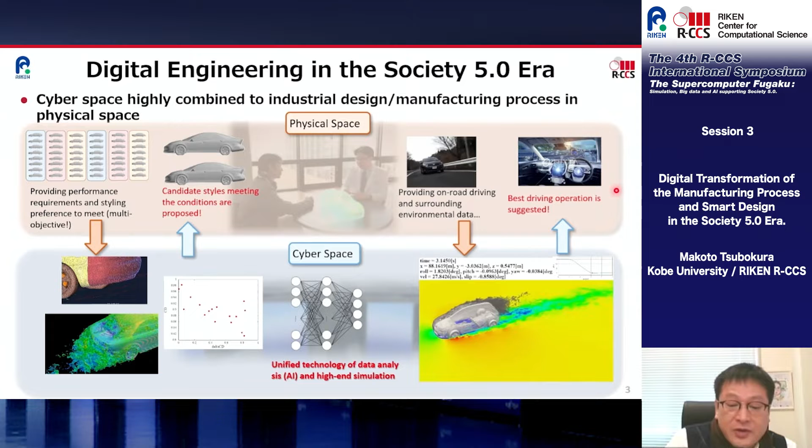On your right is a sort of digital twin, providing on-road driving and the surrounding environmental data. Many high fidelity simulations together with virtual drivers are executed simultaneously, and the AI suggests the best driving operation depending on the driving condition.

Then what sort of software should be developed to realize such digital engineering in the Society 5.0? Firstly, we have to deal with a huge number of simulations at very high speed, including both pre and post processing. Secondly, simulation should be not only high precision, but also a sort of tailor-made to realize a real digital twin by precisely reproducing each product shape and considering the enormous real-world conditions.

Unfortunately, the current engineering simulation framework based on the unstructured mesh system does not meet these requirements. Firstly, a huge amount of workload is required for the pre-processing of calculations, shown in the pie chart here. This figure shows the turnaround time for a conventional vehicle aerodynamics CFD in industry in hours. Typically, 8 times longer time is necessary for the pre-processing compared with the simulation itself. This is because of the data cleaning requirement to make a watertight surface for the unstructured mesh system.

Secondly, unstructured data fundamentally have difficulty in tuning on new hardware architectures because of the irregular memory access. There are various ways to improve calculation efficiency by serializing data access or utilizing cache reusability, but it tends to be memory access bound.

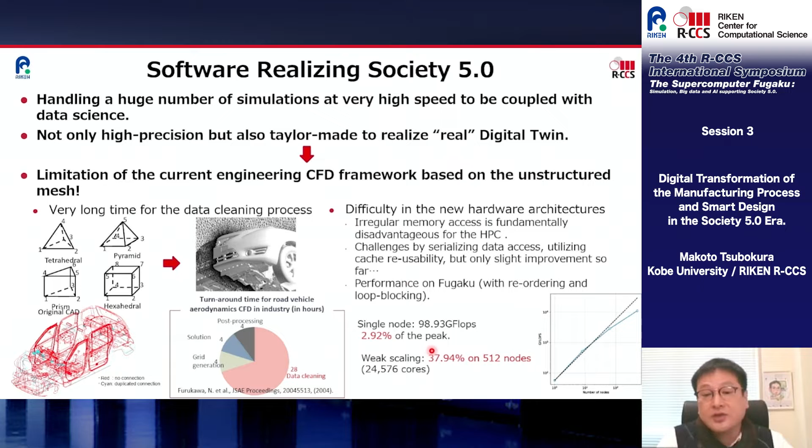So we fundamentally changed the data structures from the unstructured to the hierarchically structured grid, considering its application to HPC on massively parallel environments. Here, we adopted the hierarchical Cartesian grid as the basis of the grid system. The basic data structure is similar to that used in adaptive mesh refinement, having two fixed levels of subdivided spatial domains.

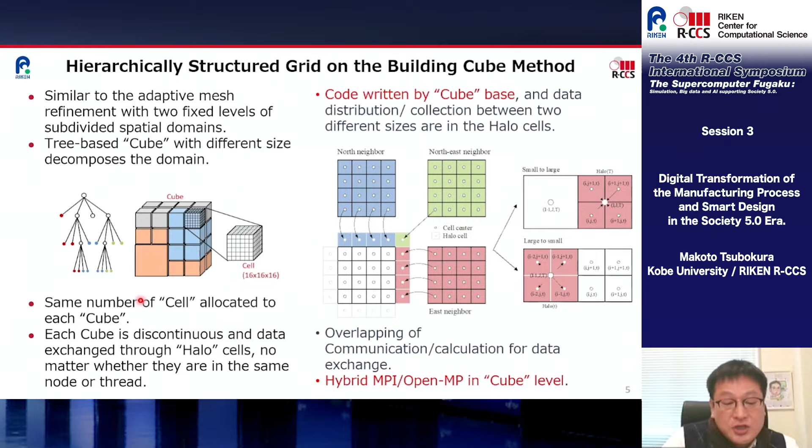The computational space is first divided into cubes, which are going to be doubled as they approach the walls of the geometry. Each cube is divided into cells, typically 16 by 16 by 16 in our simulations. Since each cube is composed of the same number of cells, it is easy to evenly distribute the computational load to each processor. So it is advantageous for achieving high degrees of parallelization.

The software is called Cube, having been developed in our team since 2012 as a complex unified simulation framework on a massively parallel environment. In this framework, we solve multiple partial differential equations on the same hierarchically structured data. For example, unified continuum mechanics equations adopted for both fluid and structure motions.

Thus, Cube is very effective against strongly coupled fluid structure interactions, which are difficult to achieve high performance for the conventional frameworks on massively parallel environments. Cube already has many achievements on the flagship supercomputers like K and Fugaku.

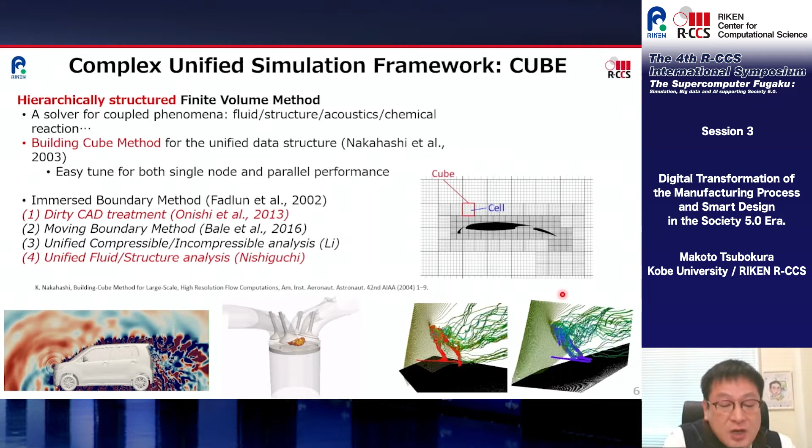On your left is a direct aeroacoustic noise prediction emitted from a small gap of a real road vehicle, and the combustion internal engine simulation in the middle. On your right is a very new result. It's a ski jumping simulation of gold medalist Ryoyu Kobayashi and its comparison with other jumpers, realizing the whole body pose change from takeoff to landing, and explaining why his jumping is superior to other jumpers.

Regarding the single node performance of Cube on Fugaku, we can achieve about 6.39% against the theoretical values, about 200 gigaflops, which is about 2.4 times faster than the Xeon Phi-based system. Still, we have room for improvement, and now we are trying to improve this performance up to 9% by utilizing memory access serialization, loop collapse, loop fission, and array dimension exchange.

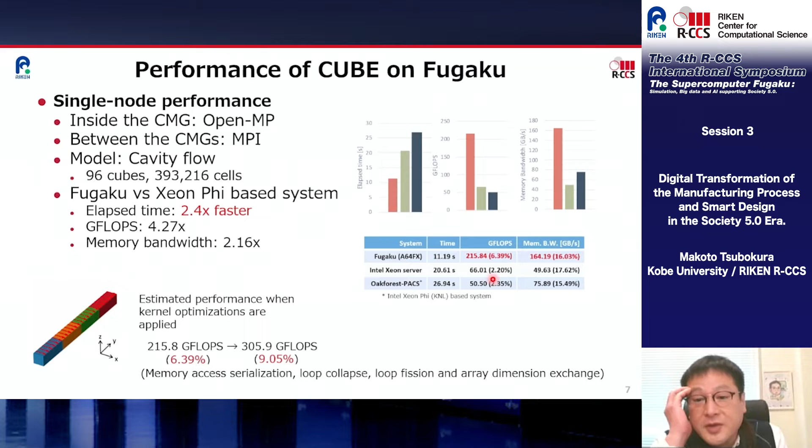Regarding the parallel performance, on your left, when the target is a cavity flow, up to 27,000 nodes, we could achieve 4.5 petaflops, which is equivalent to 4.9% of the peak, and its scaling is 91%. This is weak scaling. And on your right is a real vehicle case. We use a hierarchical structured grid, up to 51,000 nodes, and scaling of 74%.

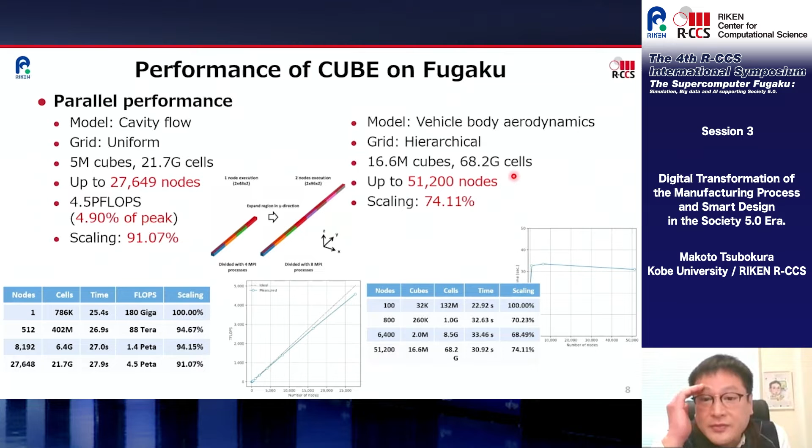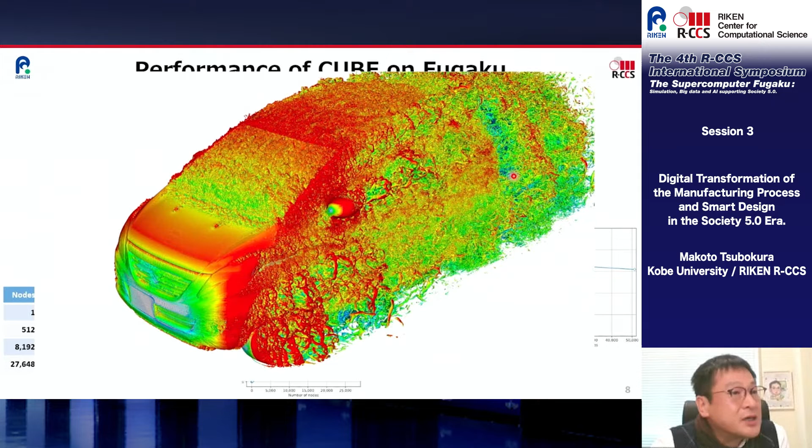So our code so far can treat more than tens of billions of meshes on the cube. So we could realize the world's largest vehicle aerodynamics simulations as shown here. But actually, these types of high fidelity, high precision simulation are not so popular in the automotive industry because of the cost required for these simulations, and they are much more interested in capacity computing.

On the other hand, the disadvantage of the method is the treatment of the wall in the fixed block mesh. In this framework, we address this shortcoming by adopting the immersed boundary method to reproduce a solid surface. Still, there is a problem of accuracy near the wall remaining in our simulations. The advantage of our improved immersed boundary method is its very fast mesh generation without modification of the original digital CAD data.

Regarding the immersed boundary method, so far, most of the existing methods can be categorized into two main streams. One is a ghost-cell method. The other is a direct forcing method. Anyway, both methods require identification of solid and fluid parts. In our new immersed boundary method, we abandoned this idea. This method is a sort of enhanced method of these two, adopting the idea of dummy cells for the wall, including the cells.

It enables us to specify the solid cell fully arbitrarily in the virtual space. Then even walls having zero thickness, or gaps or overlaps typically observed in real CAD data, can be modeled without any restrictions of geometrical topology. As a result, by this novel immersed boundary method, we could speed up the pre-processing, including CAD cleanup, by 100 to 1,000 times compared with the conventional unstructured CFD method.

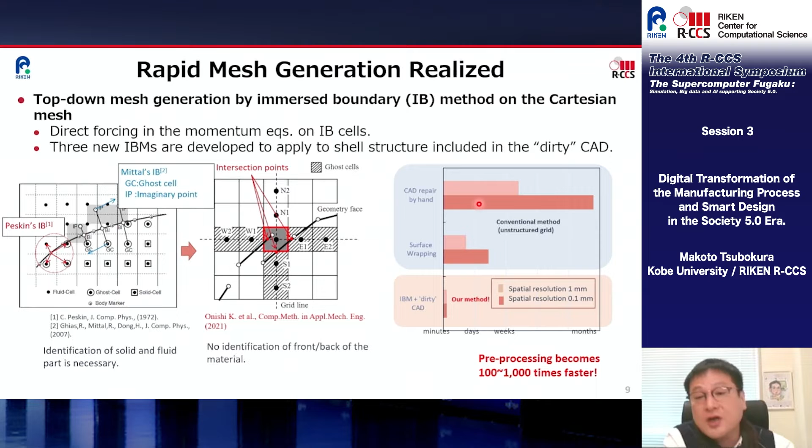Hereafter, we would like to introduce some of our achievements using this framework on Fugaku. The first one is multi-objective optimization of road vehicle shape, utilizing the genetic algorithm called Cheetah developed at JAXA. Here, we set up two objective functions relating to crosswind stability and the fuel consumption rate. The aerodynamic performance of each vehicle shape was evaluated by high precision CFD simulations, and the entire optimization process was executed fully automatically on Fugaku.

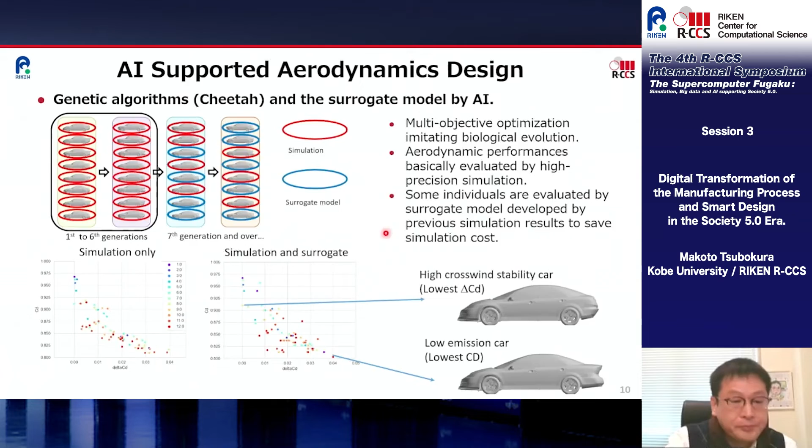The second example is a digital twin simulation realized by coupling the vehicle aerodynamic simulations and the vehicle's multi-body simulations, reproducing the vehicle body's 6 degrees of freedom motion as well as the suspension system. The aim of this simulation is to evaluate the drivability of a vehicle.

For the drivability evaluations, a very small change of the model must be reproduced as faithfully as possible, as shown here. This is because the drivers are quite sensitive to differences in the body shape. So this framework can treat very detailed vehicle geometry. It is almost the same as the real vehicle.

On your left is a lane change maneuver without turbulence. On your right is a lane change maneuver, but reproduced with atmospheric turbulence. And we are investigating how these types of turbulence affect road vehicles' performance. Not only the change in pose of the vehicle, but you can also obtain the steering input imposed by the driver riding in this vehicle.

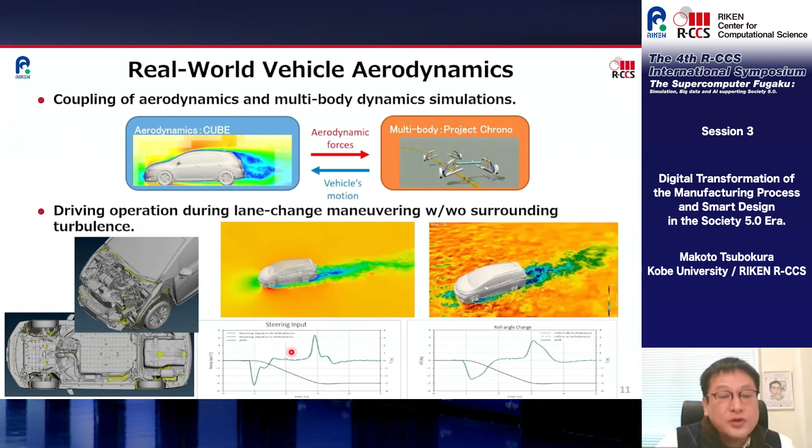The COVID-19 pandemic occurred in early 2020 when we were tuning CUBE on Fugaku. So we soon noticed that our simulation model for the internal combustion engine and fuel injection model implemented in CUBE can be utilized to simulate droplet and aerosol dispersion for infection risk evaluations. This is a sort of digital transformation of airborne transmission risk assessment.

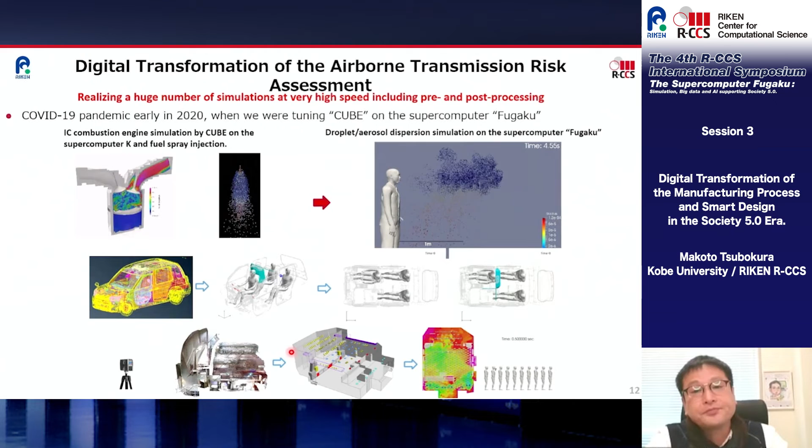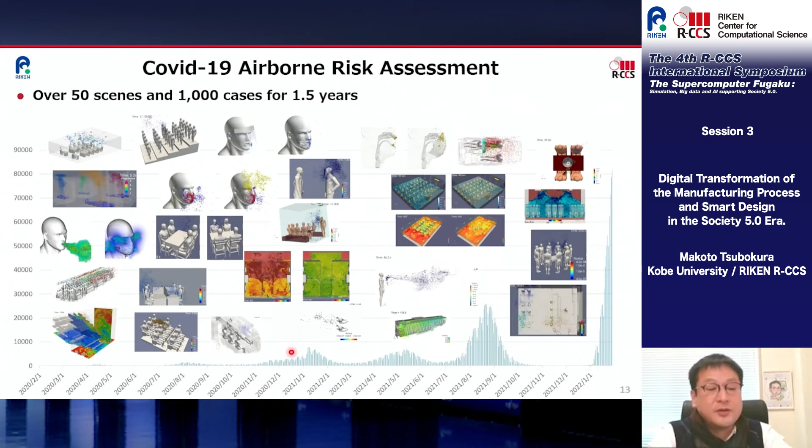As you may notice, our droplet dispersion simulations only predict the transmission of droplets emitted from the infected person and how many droplets are inhaled by the person at risk. After that, we adopted a very rough probability model to predict the infection risk based on epidemiological assumptions. To make our predictions more reliable, we have to extend our simulations with more microscopic risk assessments based on the biological model, together with more precise human body and respiratory tract numerical models.

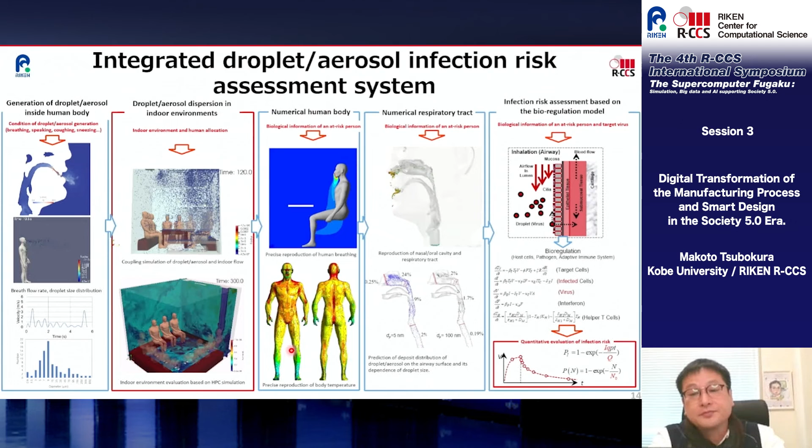This is one example of our current simulations of host cell dynamics coupled with a numerical respiratory tract. Virus-laden particles that reach the breathing zone are transported from the nose into the upper respiratory airways, partly deposited on the inner wall, and some of them transported to the lower respiratory tract.

There is a clear correlation between airway deposition and particle size. Fine particles of 100 nanometers or less are well deposited on the airway wall due to Brownian diffusion. Similarly, particles larger than 1 micrometer in diameter deposit well in the upper respiratory airways due to gravitational settling. The deposited virus-laden particles on the mucus are transported toward the larynx by mucociliary motion, as shown here. At the same time, the virus infects the host cells and begins to replicate.

The time series of the change in the number of target susceptible cells, infected cells, and viral RNA copies are obtained by solving the simple host cell dynamics model shown here. And this is the obtained result. In these analytical conditions, assuming COVID-19 infection, 2 days after the inhalation of virus-laden droplets, the virus concentration exceeded the detection limit of the PCR test and peaked 5 days after the infection.